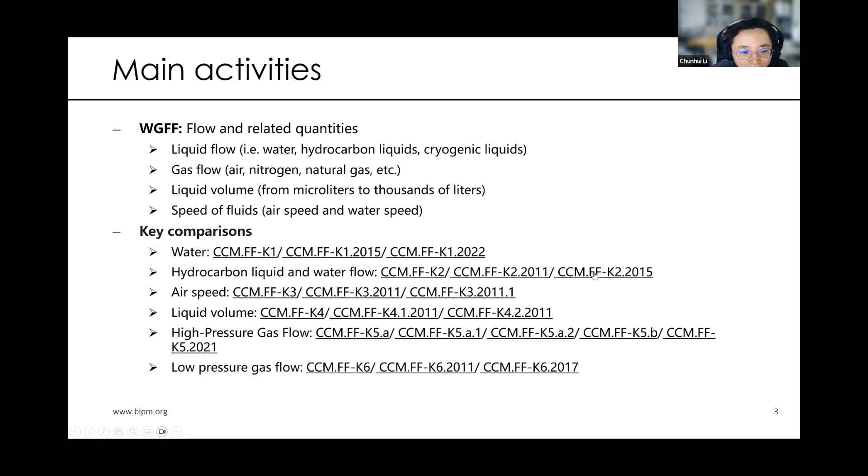And according to the requirements of the CCM and the CIPM, currently we have 2 guidance documents published on the BIPM website. The first is on CMC uncertainty and calibration report uncertainties. This document is the guide on uncertainty to ensure a consistent approach for CMC entries as well as calibration reports. This document was released in 2013. Another document is for the CMC review protocols.

This document is a guide on the intra- and inter-RMO review of new or modified CMCs to ensure a consistent approach and efficient work. In this document, according to the different areas, we give very specific requirements for the CMC evidence. So this work helps all the reviewers do these reviews very efficiently.

In fact, with the release of the KCDB 2.0, we are working on the revision of this review protocol. This work was a little bit delayed due to the pandemic, because it already started before the pandemic. We had some very detailed discussions in person, but during the pandemic this work was delayed. Last year, we had hybrid meetings in our group. So this revision work will be finished soon. We hope the revised protocol will be released this year.

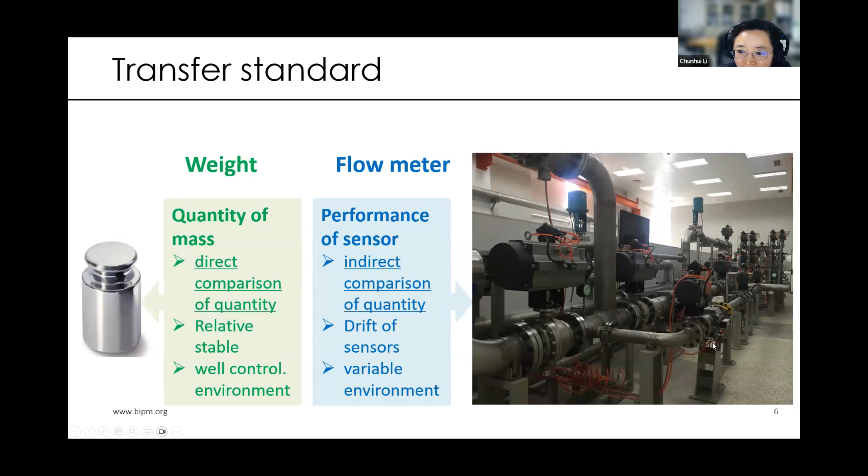But for us, you can see this typical gas flow facility. The facility is located in a relatively big space. The meter under test, the transfer meter, is here, and it is a kind of turbine meter. It is generally used for gas or water flow comparisons. For these comparisons, the flow rate is determined by the flow facilities, and we cannot achieve exactly the same flow rate.

The exact flow rate is determined by the conditions of these flow facilities. Due to the big space, the environment is too difficult to control very well. Unlike mass comparisons where temperature can be controlled to plus minus 0.1 degree, for fluid flow comparisons, especially high pressure gas flow facilities, the temperature may only be controlled to plus minus 2 degrees C or plus minus 1 degree C.

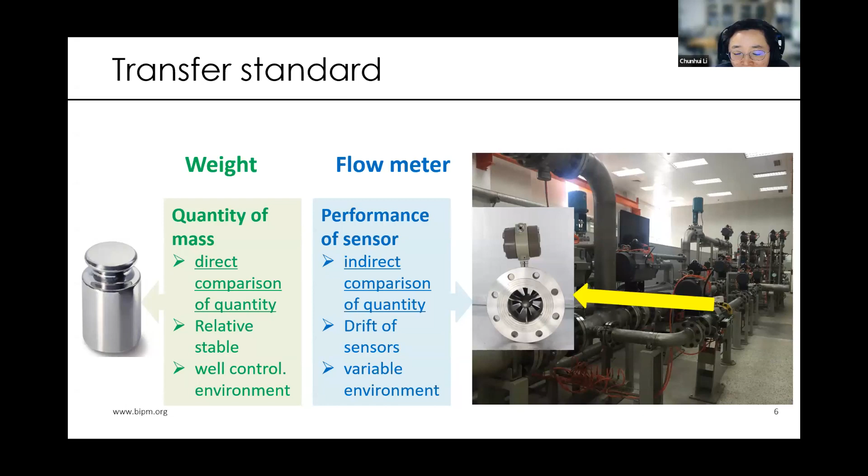There are many components for the flow meters, so the final result is a complex result. It reflects the performance of the complete sensor system, and all sensors have drift. That's the reason why the transfer meter evaluation is so important for us.

According to our available knowledge, in the future our work will be focused on 3 parts.

The first is to finish the CMC review guide as soon as possible. As I said before, this work is a little bit delayed because there's a big change for the KCDB website, and there's still some new requirements for these new guidelines. But anyway, we hope the revised guidelines will be released this year.

Another important part for the WGFF is we hope we can develop a new method for the KCRV evaluation method. I will explain more in the next page. We have started some work for this topic.

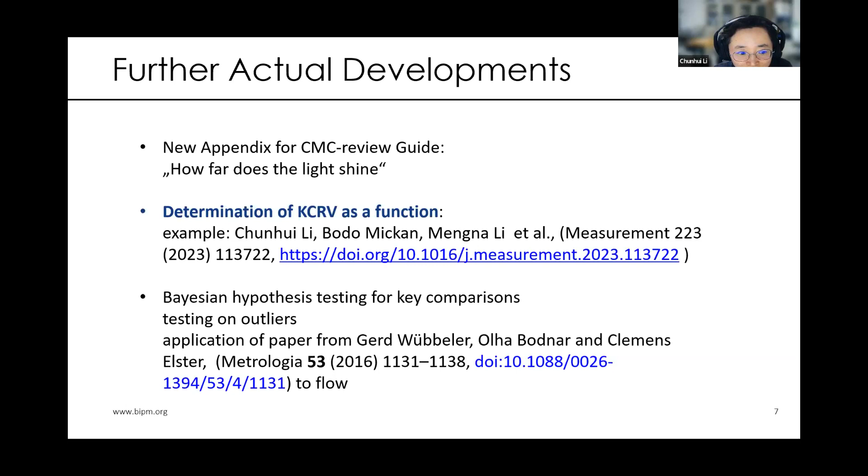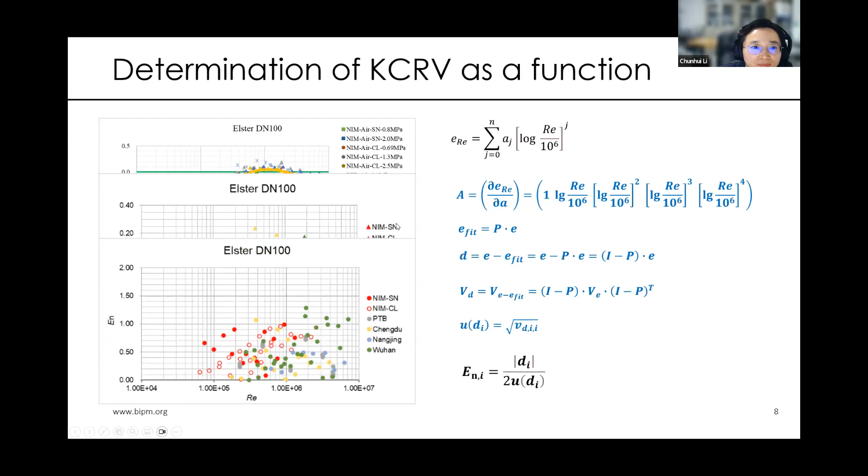For the liaisons and stakeholders part, currently each RMO has a relevant TC related to our working scope. So we organize regular communications with all the RMOs, so we can discuss what they want WGFF to work on, something like that.

For other stakeholders, IMEKO TC9 is related to our scope. For this TC9, every 3 or 6 years we also cooperate with TC9 to organize the International Flow Field Conference, to communicate with all the colleagues in the flow field.

We also have a close relationship with ISO TCs such as TC48 and TC30. And also we have a close relationship with the legal metrology OIML TC8 and other accreditation organizations in the fluid flow field.

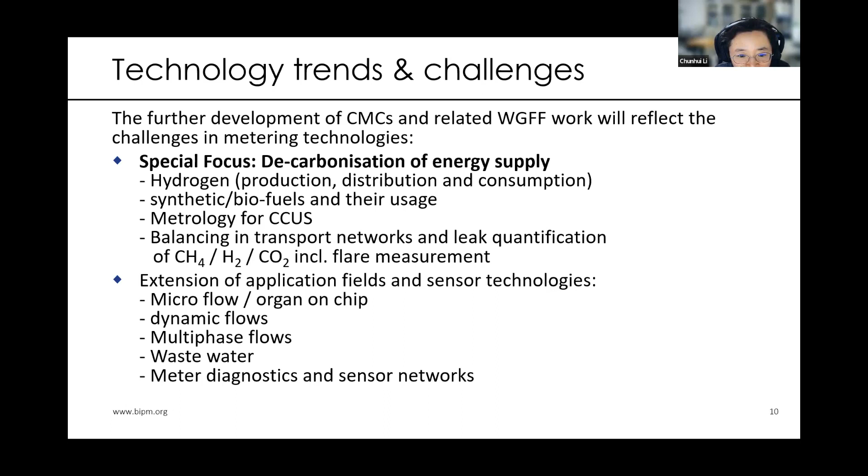For the CO2 part, we also started some work for the CCUS areas. Another topic is balancing in transport networks and leak quantification for methane, hydrogen, and CO2, including flare measurement. Another topic for us is to extend the application fields and sensor technologies, including microflow, organ-on-chip, dynamic flows, multi-phase flows, waste water, meter diagnostics, and sensor networks, and so on.

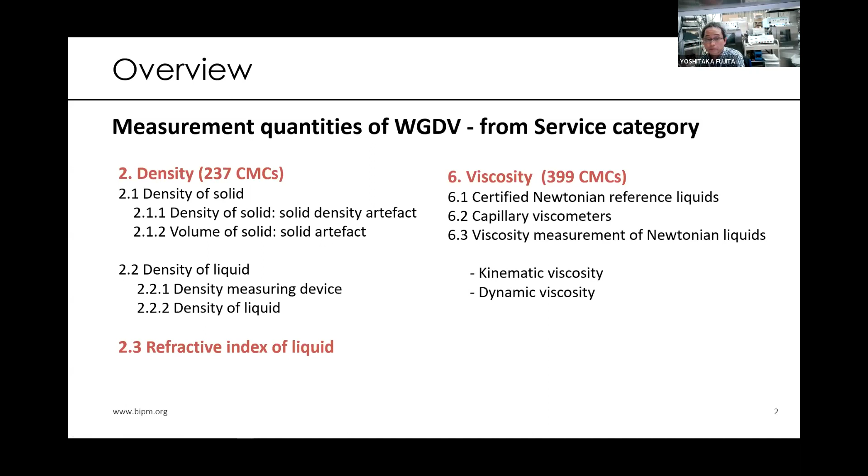As for the membership, the chair is me, Yoshitaka Fujita, NMIJ, chairing viscosity, and the vice chair is Luis Omar Becerra, CENAM Mexico, chairing density. But Luis Omar has recently sent us his intention of resigning as vice chair, so we have to search for the next candidate in the near future.

Presently, there are 26 NMIs, DI, BIPM, and 6 RMO TC-M chairs. Other than these members, as observers, approximately 10 NMIs have participated in the WG meetings.

WGDV is a merger of WG Density and WG Viscosity in 2014. The WG meeting is held in the week of the CCM meeting at the BIPM. For this WG, it's difficult to hold a meeting at conferences or other occasions, because there are almost no conferences gathering all the members of density and viscosity in one place.

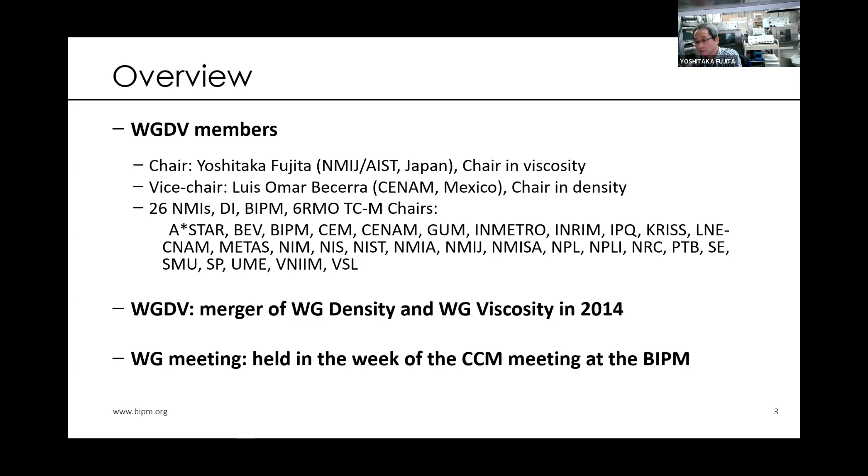In density, we have many kinds of key comparisons depending on classifications of service category, such as solid, liquid, and measuring devices. For the purpose of introducing outlines of comparisons, an example of the traceability system on density standard is shown.

Density of the silicon sphere is determined based on the defining constants of the SI, the Planck constant and the speed of light in vacuum, using the interferometric method and mass measurement.

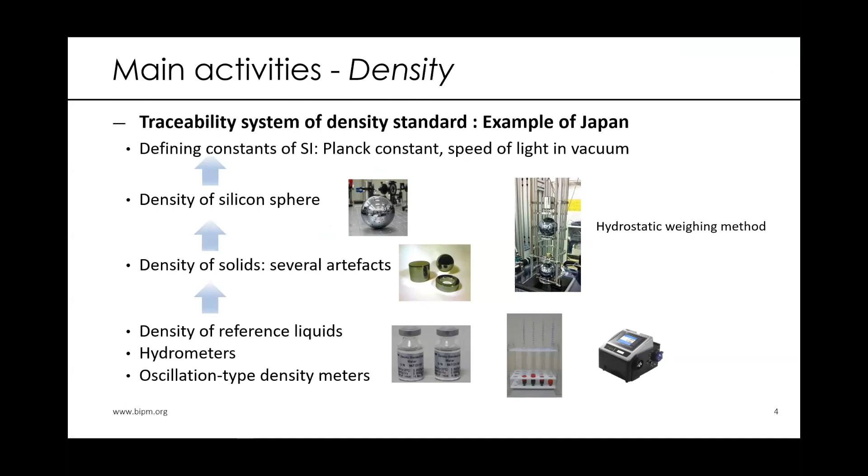Based on that primary standard, density of solids, such as several artifacts, are determined. Based on the densities of those artifacts, services of calibrations such as density of reference liquids, hydrometers, and oscillation type density meters have been provided to density users.

These are the comparisons of density. CCM DK1: density measurements of silicon sphere, being piloted by PTB with 11 participants, measurement in progress.

DK2: liquid density, pilot not yet decided, planning under consideration. Sharing activities for sample preparation by a collaborating group, and also sharing cost among participants, were suggested in the discussion of the last WG meeting.

CCM DK3: density measurements of stainless steel weights, being piloted by NMIJ with 15 participants, protocol in progress. CCM DK4: hydrometer calibrations, planning is awaited to start. CCM DK5: density measurement by oscillating type density meter, being piloted by BEV with 17 participants, measurement completed.

Lastly, a pilot study of surface tension. This was proposed as a new field in the last WG meeting, and about 7 NMIs are interested. A similar project has been implemented in a preceding EURAMET project, so initiating planning by some NMIs for this project is expected.

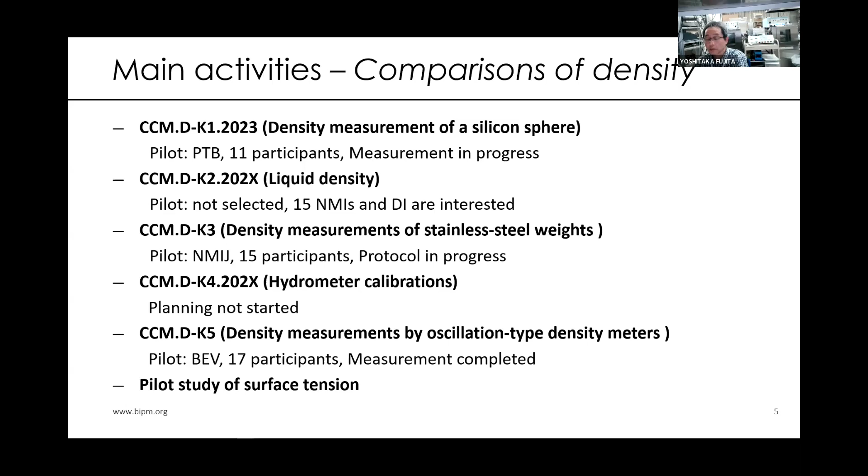And this shows a comparison of refractive index of liquid. CCM DK6 being piloted by NMIJ. 10 NMIs, including a few NMIs in CCPR and DI, are interested, and a questionnaire is in progress.

And also showing standard liquids. It is to be distributed to participants, covering a certain range of refractive index with several kinds of liquids.

There are two methods for absolute measurement of refractive index of liquids. One is the interferometric method. Refractive index is determined by measuring changes in the optical path, the optical path differences between sample and vacuum.

The other is the minimum deviation angle method. The refractive index is determined by measuring the minimum deviation angle of incident light and the apex angle of the prism.

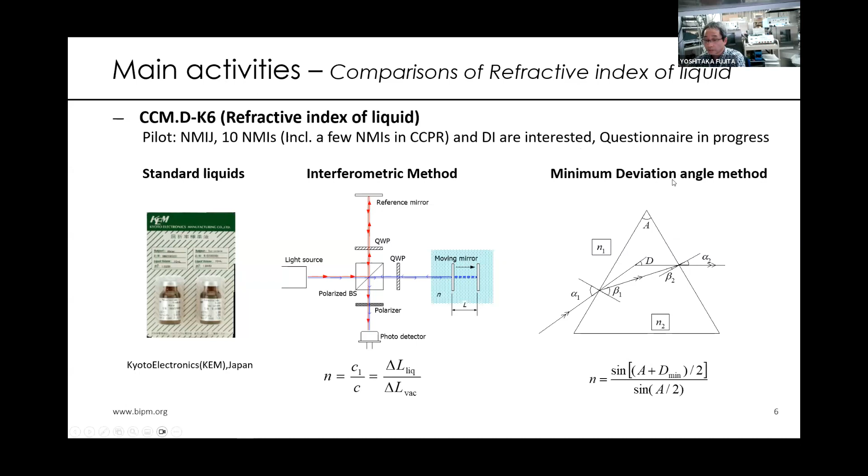This figure shows the total system of the viscosity standard. The metrological base is the absolute value of water viscosity described in ISO. Based on this viscosity, instrumental constants of viscometers are successively calibrated up to the viscometer for high viscosity range, which is called the stepping-up procedure. By using these master viscometers, the viscosity scale covers a wide range of viscosity, more than 100,000 times the water viscosity.

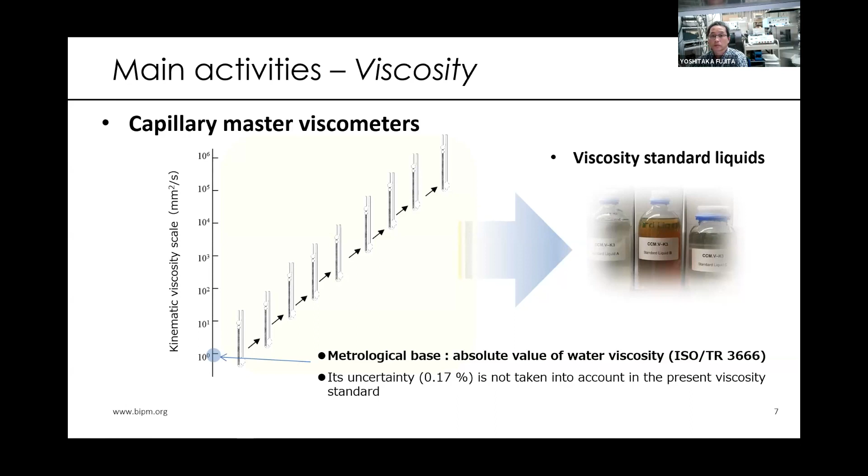Two or three standard liquids with different viscosity levels are distributed to the participants of key comparisons. So far, 3 key comparisons have already been completed, and 2 key comparisons are underway.

CCM VK4, piloted by CENAM, Mexico, with 12 participants. Draft B is in progress, and this is almost completed.

And CCM VK5, piloted by NIM, about 15 to 16 NMIs and DI are interested in participation. The questionnaire will be prepared in the near future.

Each key comparison has been carried out by alternating between wide viscosity range at moderate temperatures and moderate viscosities in the wide temperature range.

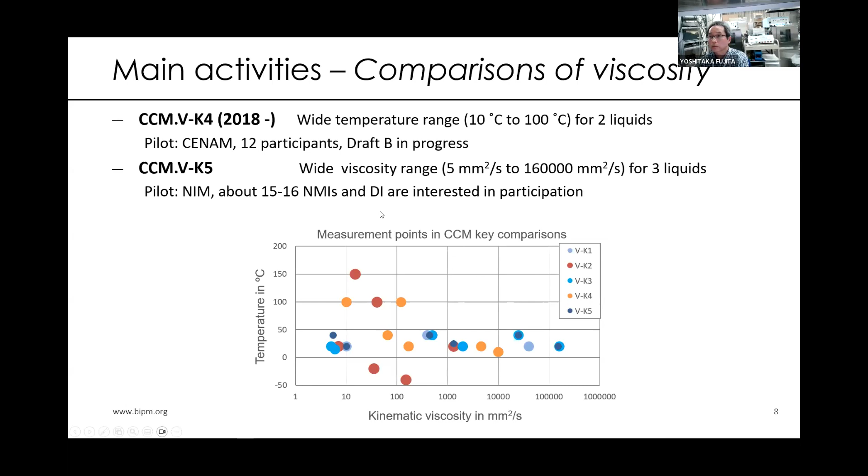This is for guidance documents. As to the guidance documents, according to the CCM action plan, we presently have no document and have just started to work toward documentation about simplification and reduction of the number of CMCs for viscosity.

The number of entries of viscosity is doubled by two quantities, kinematic viscosity and dynamic viscosity, and also tripled with the addition of reference liquids. So, kinematic viscosity is an essential quantity in capillary viscometry that is underpinned by key comparison. It was proposed in the last WG meeting that dynamic viscosity and reference liquid be merged into one entry of corresponding kinematic viscosity using the comment column.

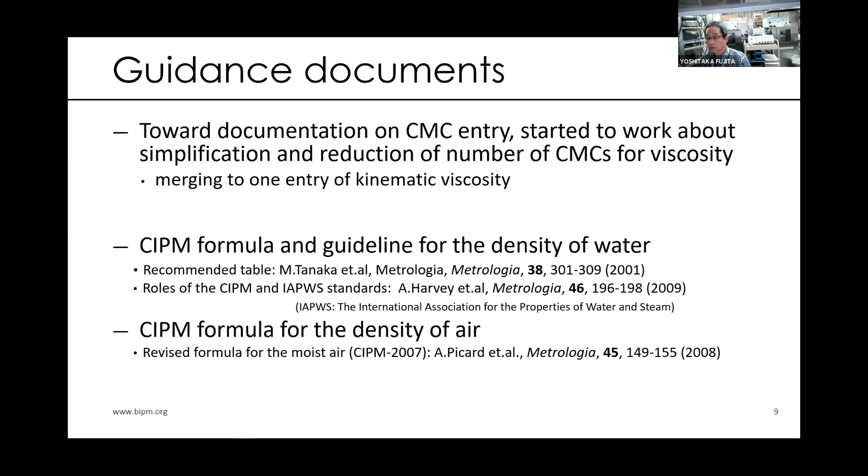As a past result, WGDV contributed to the establishment of the CIPM formula for the density of water in 2001, and then published a guideline for the use of CIPM and IAPWS. IAPWS is the International Association for the Properties of Water and Steam. It also contributed to establishing the CIPM formula for density of air in 2008.

As for liaison and stakeholders: in liaison, ISO TC48 SC4 regarding density hydrometers. At the request of this ISO committee, Vice Chair Luis Omar has participated in this committee and acted as liaison between the ISO and WGDV.

As I mentioned before, as a past result, we had relationships with IAPWS on the guidelines for the use of CIPM and IAPWS formulas. Some members of WGDV are involved in RMO projects, for example this Euramet project, one for density measurement and the other for viscosity measurement, which have been reported in the WG meeting, in the last WG meeting.

As for stakeholders: industries of energy, alcohol, food, materials, refrigeration and air conditioning, and manufacturers of density meters, refractometers, and viscometers, and reference material producers, and calibration and testing laboratories such as accredited laboratories and agencies involved in taxation related to alcohol taxation using density measurement.

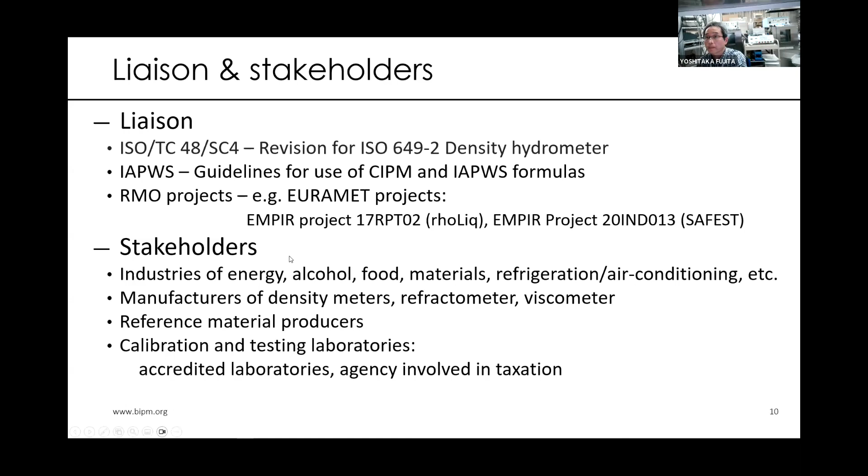As for technology trends and challenges: realization of a more accurate and reliable silicon density standard based on reduction of uncertainty in sphere volume measurement. It is expected that this would be reflected in the result of the key comparison on density measurement of silicon spheres and other varieties of density measurements in the future.

And supplying traceable refractive index standard liquids, ensuring reliability by implementing key comparison CCM.D-K6, to meet the demand from food industry and agriculture. And supplying traceable surface tension reference for reliable measurement in science and industry.

And application to interdisciplinary areas based on accurate density measurement. One is seawater density measurement to predict global climate change. The other is pρT properties over wide pressure and temperature ranges, to meet the demand for improvement of heat pump systems using alternative refrigerants to prevent global warming.

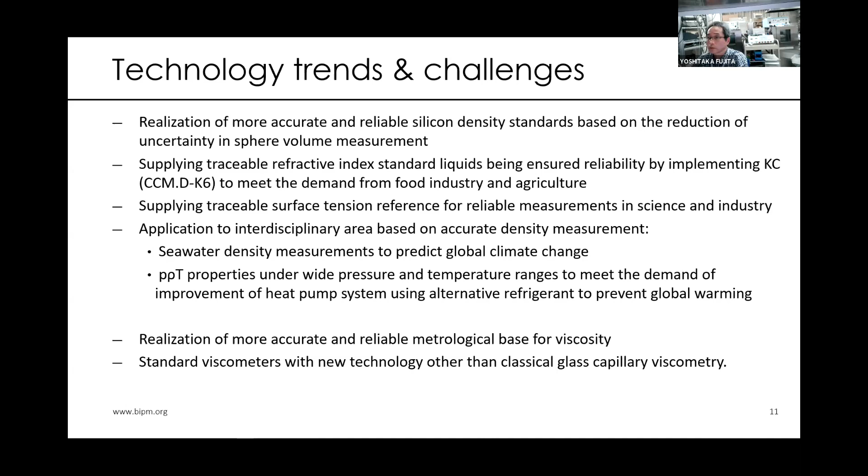And this is an interdisciplinary topic of density measurement for global environmental science. Global level circulation of ocean water affects global climate change due to its high heat capacity that is much larger than that of atmosphere. And in the study to understand the mechanism of global climate change, accurate density of seawater that is traceable to SI is required with uncertainty of less than 1 ppm.

To achieve this subject, hydrostatic weighing system for seawater has been developed to increase in accuracy of standard seawater for calibration of oscillating tube densimeter used in the actual ocean observations.

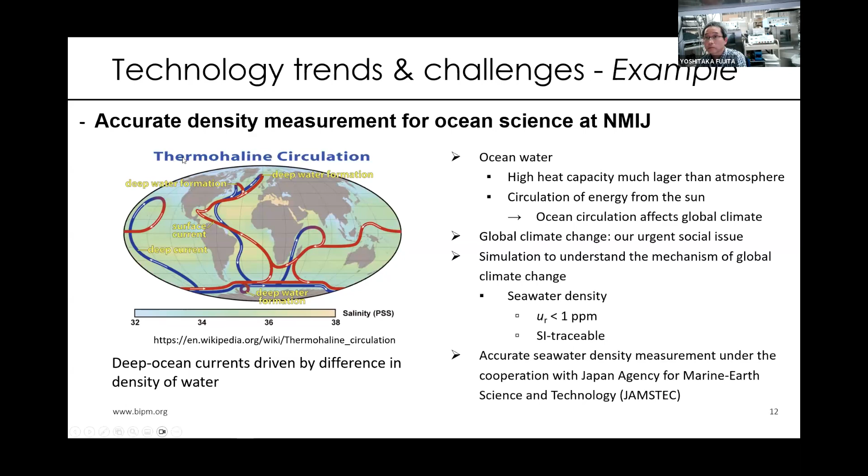And this is a topic for realization of more reliable and accurate metrological base for viscosity. Uncertainty of this metrological base, the absolute value of water viscosity, is 0.17%, that is described in ISO. But this uncertainty is not taken into account in the present viscosity standard. This is due to ambiguities of ISO value originating from a few results of previous absolute measurements. So new experimental results with modern measurement technology have been required to update this value.

And to achieve this subject, absolute measurement system for viscosity determination at middle high viscosity by falling ball method has been developed. And based on this determined viscosity, viscosity of water will be determined by using stepping down procedure of capillary method with the uncertainty of less than 0.1%.

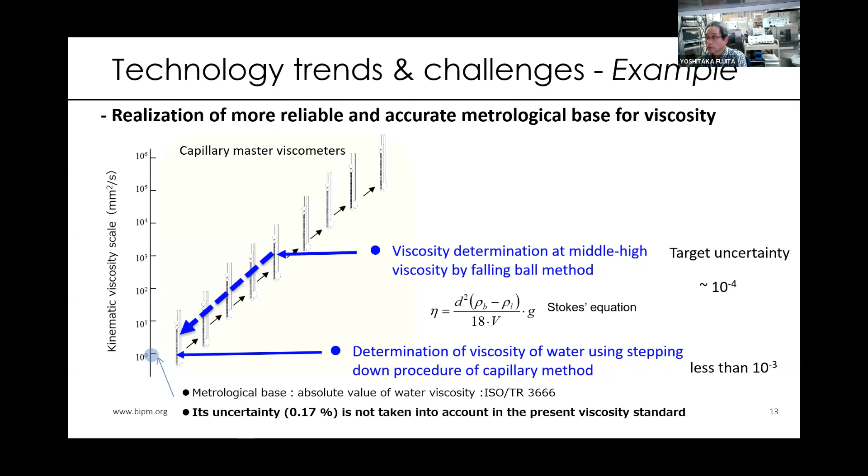I'm Julia Scherschligt. I recently became chair of the working group on pressure and vacuum. We were formed in 2014 through the merger of the working group on high pressure and the working group on low pressure, which of course is vacuum. And it was determined at the time of the merger that leadership must represent both aspects. So I am nominally a vacuum expert, and our vice chair, Dr. Hiroaki Kajikawa from NMIJ, is a pressure expert.

We have 21 member institutes and 6 observer institutes representing all RMOs. And we have CMCs in pressure and vacuum that cover the range from nanopascal to a gigapascal. Unlike some of the other working groups that we've heard from, we only concern ourselves with a single unit. So we're just worried about the Pascal, but we do have to worry about that unit over 18 decades.

For context, 1 atmosphere is about 100 kilopascal, and it might be an interesting question to ask yourself, is this the distinction? Is this where we draw the line between what is pressure and what is vacuum? That sometimes is a nice way to think about it, but realistically, the distinction between pressure and vacuum is really more about the technology used to realize the unit and less about exactly where on this pressure range you're talking about. So it's more of a technological distinction and less about a numerical distinction.

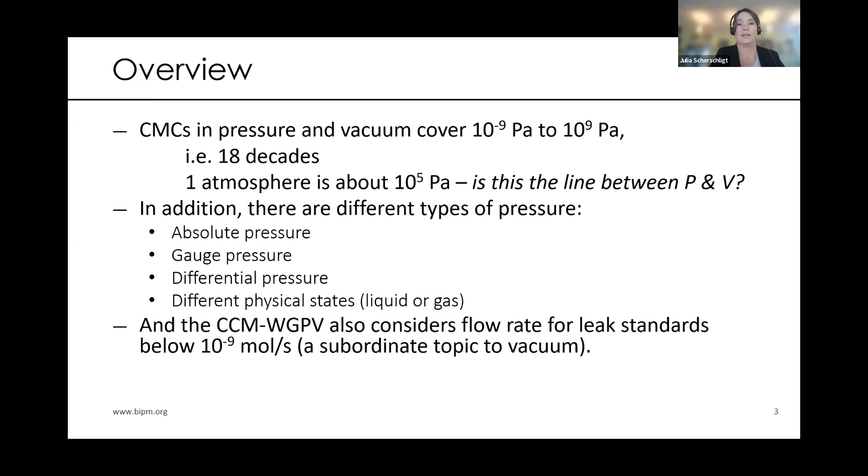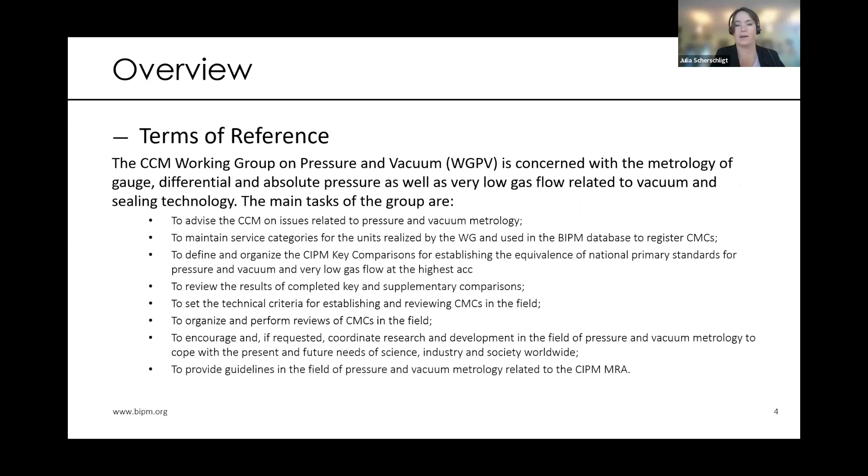And a lot of the technology used to do a calibration of one of these standards is the same as the technology that's used to do vacuum calibrations. And so it makes sense for us to also take care of that particular item within the working group. If you go to the website, you'll find a list of terms of reference, which nicely encapsulates the things that we work on. However, I find this a little bit hard to make sense of. It's a little bit too large. So I summarized it down to a few bullet points.

And then of course, to liaise with technical colleagues and stakeholders to ensure that our activities within the working group are aligned with their activities in the field so that as their needs evolve, our support evolves along with those needs so that in the future we continue to meet their needs.

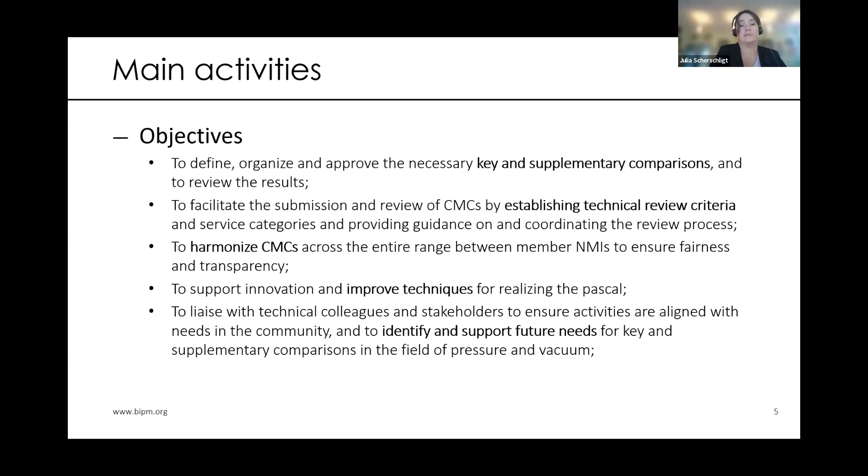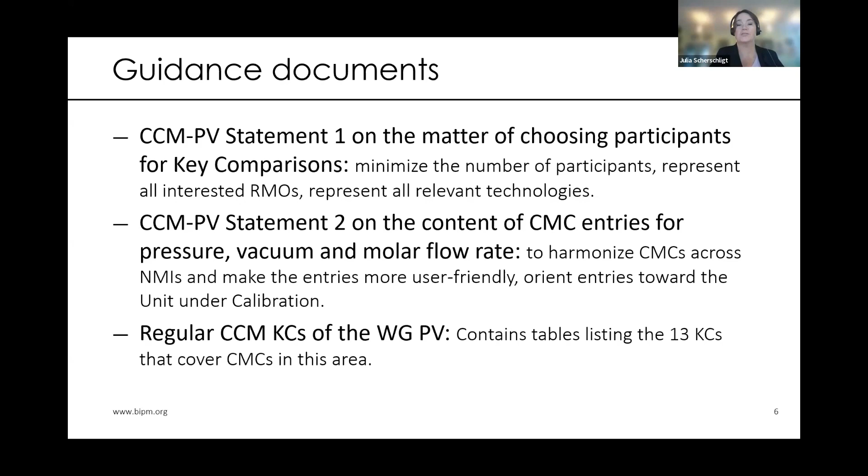We also, of course, have all of the key comparisons presented online, and we have a statement 2, which is regarding the need to orient CMC entries towards the unit under calibration. And this is because we cover across these 18 decades of pressure, there are a number of different types of gauge, types of technology. And if someone comes to the website to look for which NMI they might want to use to have something calibrated, they might want to search for that particular gauge. And we want to make that as easy for them as possible.

This statement 3 is a relatively new one, and I'm not sure whether or not we have a final version of this on the website or not, but this was just recently completed within the past couple of years. It was developed by a task group that I was involved in. And what this thing does is it ensures that the uncertainty reported by the CMC includes an uncertainty from the unit under calibration. In other words, say we have two NMIs, NMI 1 and NMI 2.

And NMI 1 believes that it is correct and appropriate to include the test unit uncertainty in their CMC, but NMI 2 does not. When they publish those CMCs, they're going to have vastly different uncertainty statements, despite perhaps being very similar in what they can actually deliver. And so someone coming to the website might think that their capabilities are rather different when in fact they're very much the same.

In order to correct that discrepancy, we wanted to ensure that all NMIs are including the uncertainty of the unit under calibration and that they're doing it in a uniform way. So we just developed a list of best possible units under calibration for each type of pressure in each range, and a statement on the uncertainty of that best unit under calibration.

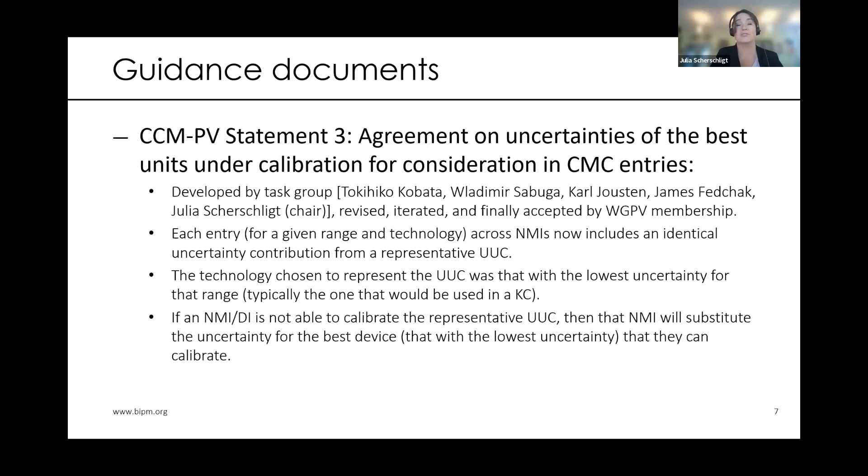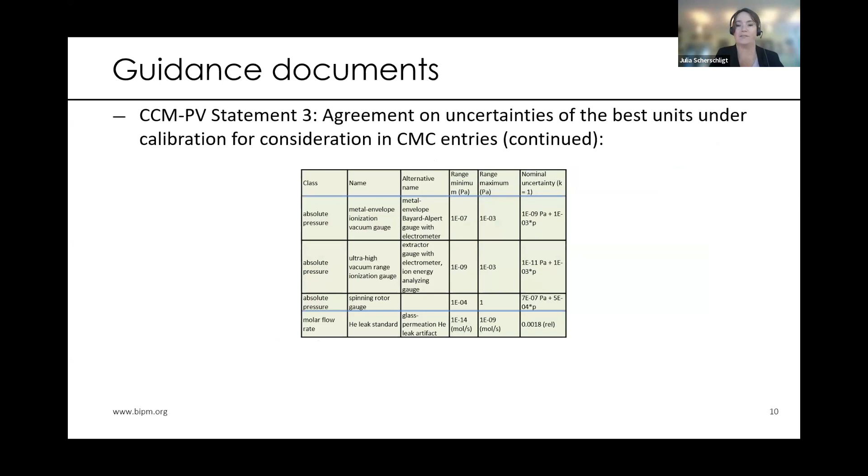One last guidance document to talk about is the one for reviewers of CMC entries. This is another recently completed document. And what this allows us to do is provide guidance for someone who's tasked with reviewing a CMC. Let's imagine that you've been given this task and you receive documentation and you don't know whether or not the documentation that you've received is adequate. And so you would go to this document and you would say, all right, I have received an application for a CMC, and I am going to determine using this document whether this is a high risk, a medium risk, or a low risk CMC.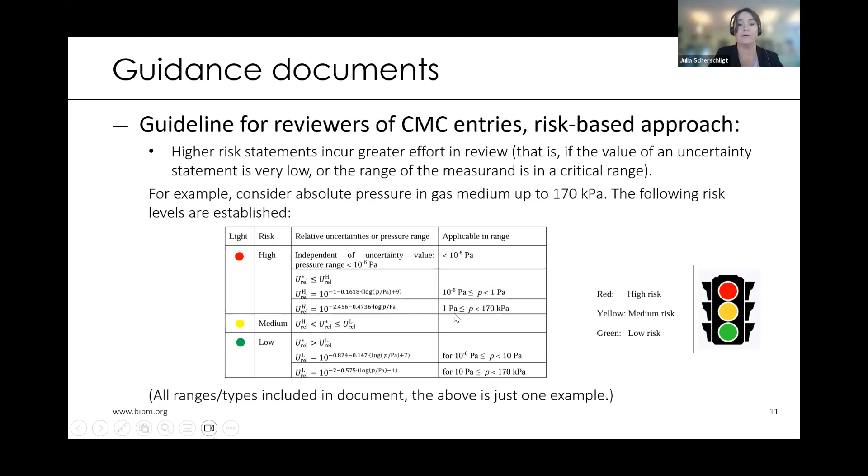There are these charts in the document that will allow you to calculate the risk level based on the uncertainty claimed in the CMC relative to the uncertainties in this document. You make the determination of the risk level, and then once you have that, this example is for absolute pressure in gas medium up to 170 kPa. Let's imagine that you've established this particular CMC that you're meant to review is a medium risk level.

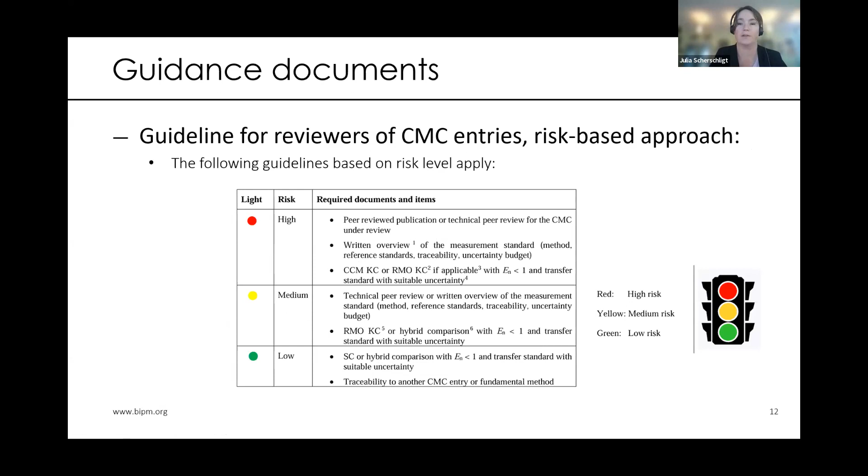Then you would go to this chart, and that tells you exactly what documentation you need to have in order to make that determination. And in our case of a medium risk level, you need to have a technical peer review or written overview of the measurement standard, along with key comparison or hybrid comparison. And then depending on the type of pressure that you have and the uncertainty level, these charts are available in the document covering all of the CMCs that we have.

So that covers all of the guidance documents that we have on the website. The last thing before we get into the technology part is liaison and stakeholder activity. We're active in a number of technical committees, including IMEKO TC16 for pressure and vacuum, the International Union of Vacuum Science, Technique and Applications, IUVSTA, a number of other vacuum societies, IVC, EVC, and AVS are all vacuum societies, along with the ISO Vacuum Technology Technical Committee.

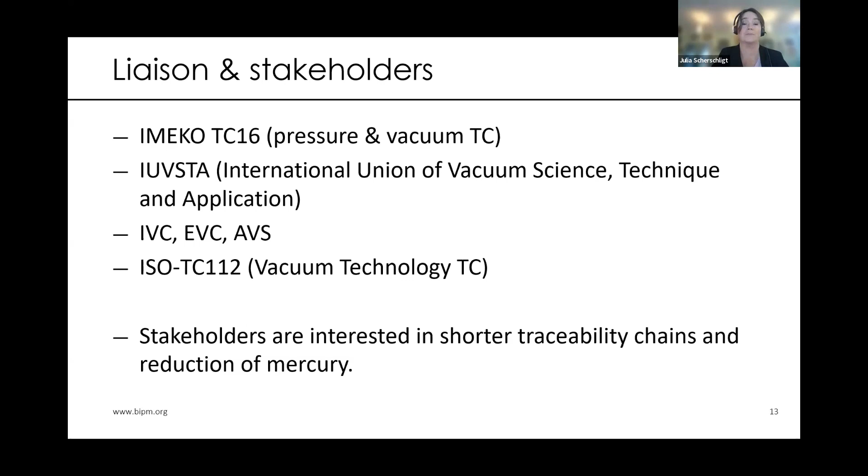It's interesting to point out that most of these are oriented towards vacuum. There are not as many activities in pressure as there are in vacuum right now. And by and large, these stakeholders are primarily interested in, can we do something to shorten the traceability chain? And many, but not all of the stakeholders, of course, are also interested in the question of whether or not we can reduce mercury. The reason that's interesting is because historically, the primary pressure standard is the mercury manometer.

The operational range of a mercury manometer is around an atmosphere. Pressures above and below can be traceable to manometry by potentially many successive comparisons. And so these liaison and stakeholder interactions lead us to ask the question, can we realize pressure at any or all ranges without reliance on manometry? So that is

the guiding principle by which we ask ourselves, oh, there go the dogs.

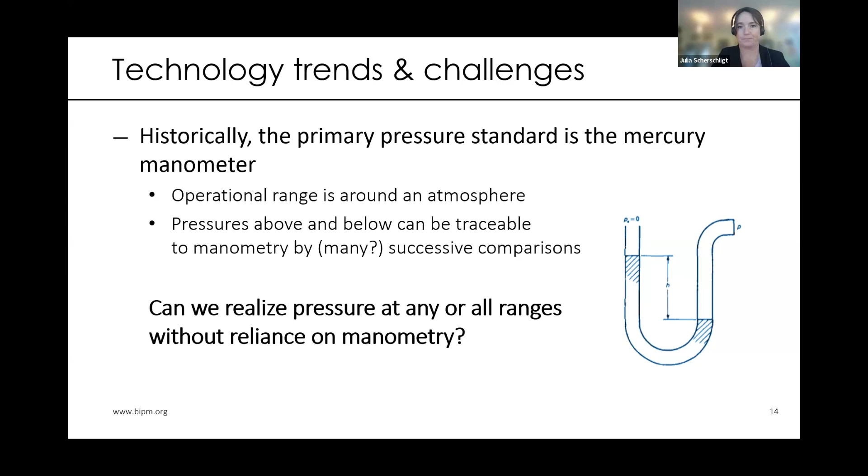What types of research projects we should look into. And it turns out that there are a number of ways to determine pressure that don't rely on successive calibrations traceable to a mercury manometer. And there are examples of this that span the pressure range from megapascal into nanopascal. And I'm going to highlight a few of these. This one is a paper that's out of PTB a few years ago.

This is a primary gas pressure standard that's based on electrical measurements. In the figure, you can see there is a traditional pressure realization device, a piston gauge that I'm sure many of you have seen. And it's connected to another device that allows a researcher to combine theoretical values of helium polarizability with theoretical values of virial coefficients of helium.

And of course, to remind you, virial coefficients are necessary when we expand the ideal gas law to the case of real gases with interacting particles, in other words, at higher pressures. And we include a measurement of a dielectric constant, and a change in capacitance gives us a change in pressure. So this is a primary realization of pressure at megapascal that does not rely on calibrated masses.

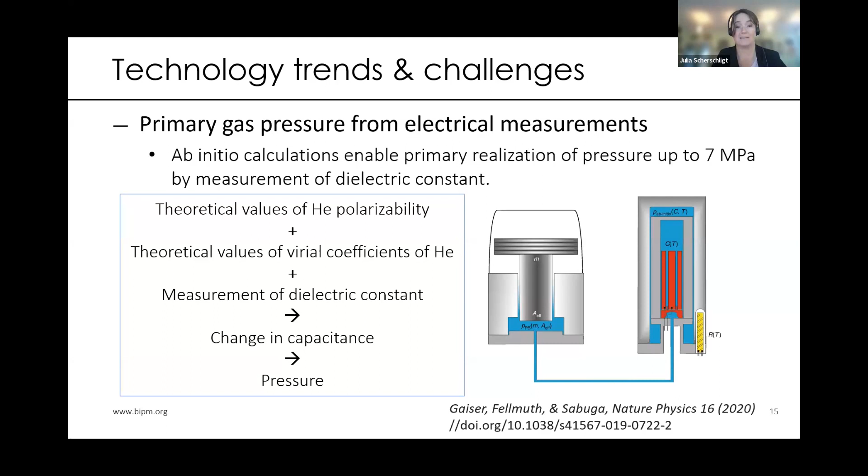We have another technology that operates around an atmosphere based on refractometry. There is an effort at NIST, which is my home institute, to develop this, as well as an effort in EMPIR. This is a technique that takes a dual cavity device. One cavity is filled with the gas of interest, and the other cavity is maintained at a vacuum. And when a laser is introduced to this device, the laser that traverses the gas-filled cavity picks up a phase shift relative to the one that traverses the vacuum-filled cavity.

And when the light is recombined, there's a beat frequency that transduces the pressure inside the cavity. And that is traceable again to helium calculations, in this case, again, the virial coefficients at higher pressures, as well as the polarizability. And that means that this is, again, a primary standard for helium, and it can be made in a deployable form factor. So this can be made into a device that you could bolt onto your chamber and get a primary measurement of pressure without needing traceability to a manometer or a piston gauge or any other pressure measuring device.

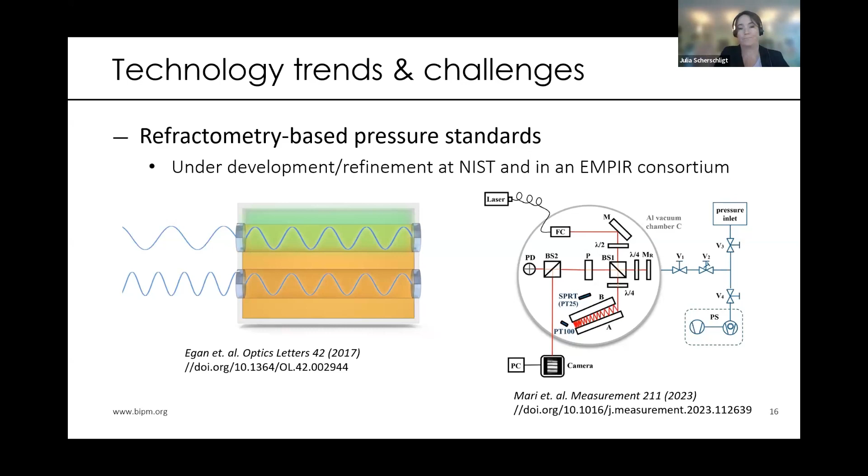And then finally, at the very lowest end of our scale, there's work to develop vacuum standards based on cold atom traps.

And this is work that I've been involved in. The NIST prototype is shown in the photograph on the right. And the way this works is the following. It has long been known that the lifetime of a trapped cloud of cold atoms depends on the level of vacuum in the chamber. And all we do is invert that relationship to turn it into a sensor of the vacuum. And that sensor is based on the lifetime of the trapped cold atom cloud.

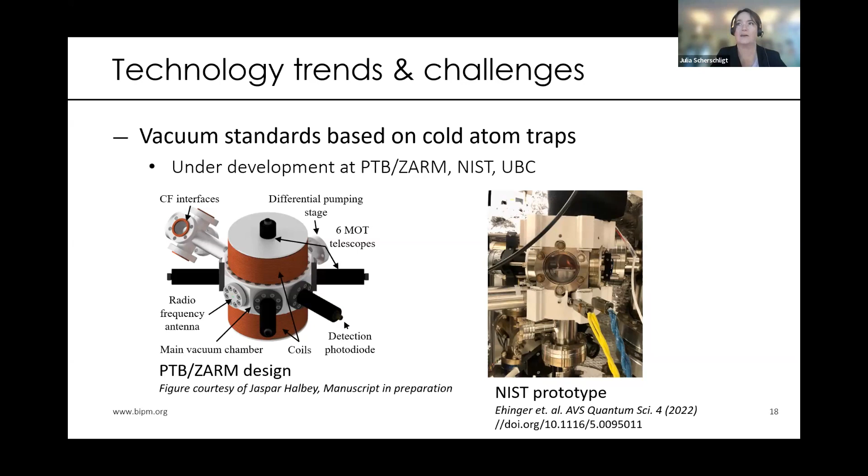If you do this carefully and painstakingly, and you take very good care to make sure that all of your possible uncertainty components are minimized and included, this again is primary. Our prototype is up and running, it works, and we've got a number of papers out. There's one under development at PTB, and the University of British Columbia in Vancouver has one as well. They've got a number of papers. I apologize, I don't have a photograph of that one, but if you want to look it up, the PI on that project is Kirk Madison. And again, that's out of the University of British Columbia.

So to sum up all of those technology trends and challenges, the important thing to point out here is that for pressure, we can call a Pascal a Newton per square meter, but it's also an energy density. It's also a joule per cubic meter. And in light of the redefinition of the SI in 2019, and all of these emerging techniques that allow us to realize the Pascal in a fundamentally primary way without reliance on successive chains of calibrations back to manometry, it might be useful to start to think about how our relationship to mass metrology should evolve.

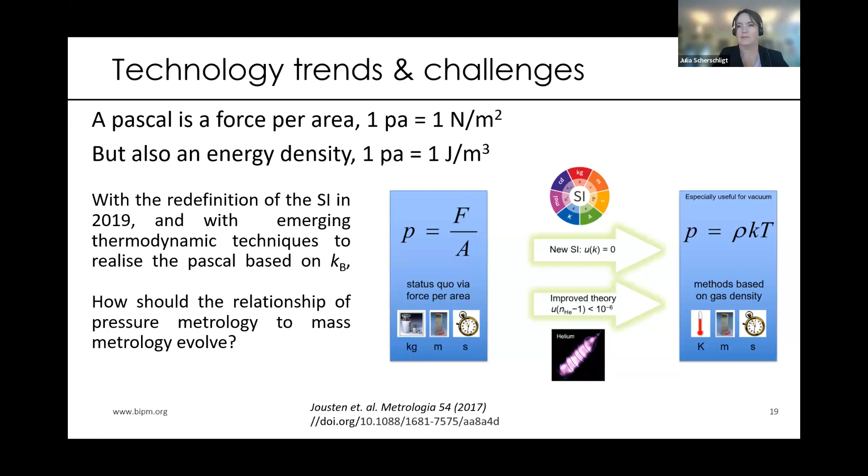And at the moment, of course, all of these techniques and technologies are new and we don't have them deployed in the field. And it will be decades before people actually get rid of their manometers. People will never get rid of their piston gauges, and we're not going to divorce ourselves from mass anytime soon. But the day might come, and it might be time to start thinking about what that will look like when it does come. So with that, I will wrap up, and thank you very much for your attention.

Okay, then I have to present the working group on hardness. An overview: the chair in this working group is me, Febo Menelao. I'm from PTB in Germany. Our vice chair is Dr. Koichiro Hattori from NMIJ in Japan. We have 18 national metrology institutes which are members in our working group: CENAM from Mexico, INMETRO Brazil, KRISS Korea, INRIM Italy, NIMT Thailand, UME Turkey, SMU from Slovakia, VNIIFTRI from Russia, GUM Poland, VNIIM also from Russia, KEBS from Kenya, LNE France, NIM from China, NIST USA, NMISA South Africa, NPL United Kingdom, RISE Sweden, and VSL in Netherlands.

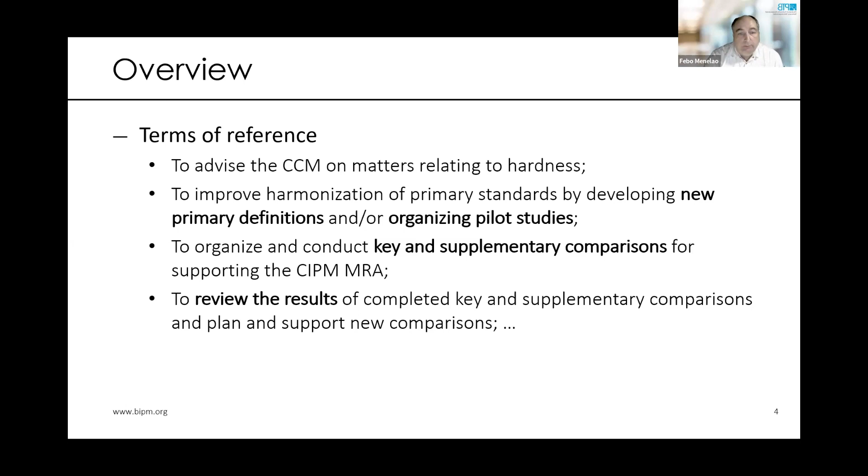Our terms of reference: the working group advises the CCM on matters relating to hardness, to improve harmonizing of primary standards by developing new primary definitions, to organize pilot studies to conduct key comparisons supporting the CIPM MRA, to review the results of completed key and supplementary comparisons and plan and support new comparisons, to facilitate the submission and review of the CMCs by establishing technical review criteria and service categories and providing guidance on coordinating the review process,

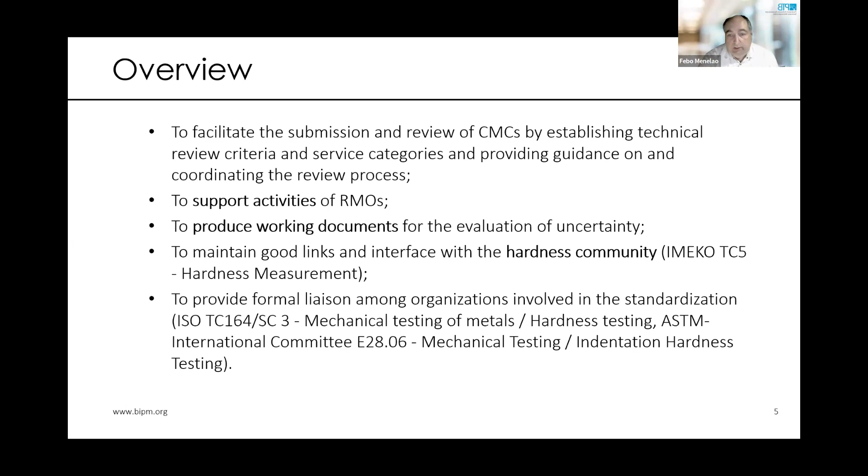to support activities in the regional metrology organizations, to produce working documents for the evaluation of uncertainty, to maintain good links to interface with the hardness community, for example the IMEKO TC5, and to provide formal liaison among organizations involved in standardization. That means the ISO community, also the ASTM community.

Mostly the audience is not so familiar with hardness, so in short, explaining by the definition: hardness is the resistance that one body offers to the penetration of another harder body. That means we do not really have a natural constant for our measurements, like the mass and so on. That makes our measurement a little bit complicated.

The description of the procedure is the definition for the value. It is not possible to calculate values between scales; between scales, you can only convert. So we have many scales in this working group: scales like Brinell, Vickers, Rockwell, which are the standard or a little bit older measurements, Knoop, Leeb, Shore for metal, Shore for plastic.

IRHD is called International Rubber Hardness Degree; it's for rubber. Instrumented indentation tests are for many materials which are possible to measure with it. UCI is an ultrasonic contact impedance measurement. The Poldi hammer, also through-indenter viewing scales, and many more which I cannot say here. The list is a little bit longer, but not all of the scales are involved in our working groups. Also, we measure not only the hardness itself, but also the indenters which penetrate the material.

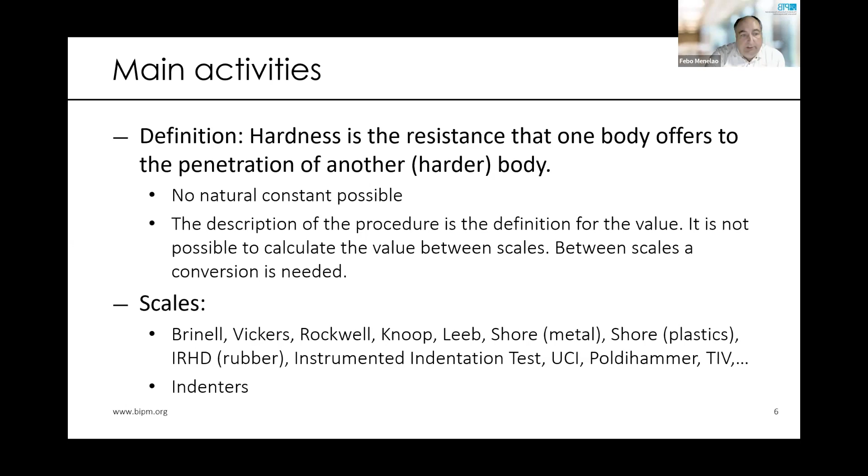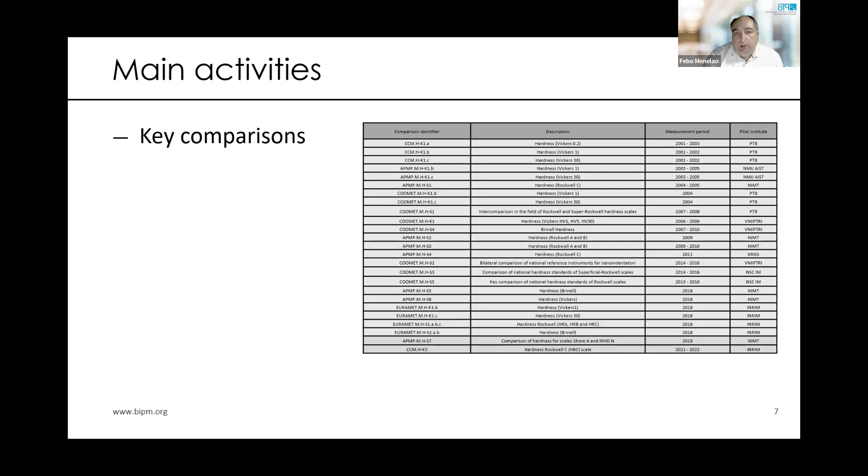Key comparisons: here's only a list which we can find on the BIPM website in the KCDB. It only shows you the number of key comparisons or comparisons that we have. The problem itself is we do not have the complete group inside the comparison, because we mostly have regional comparisons which are not registered by BIPM.

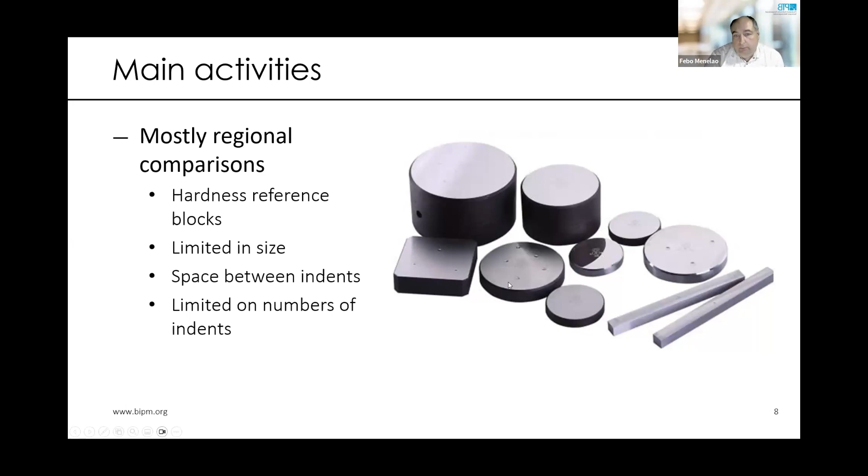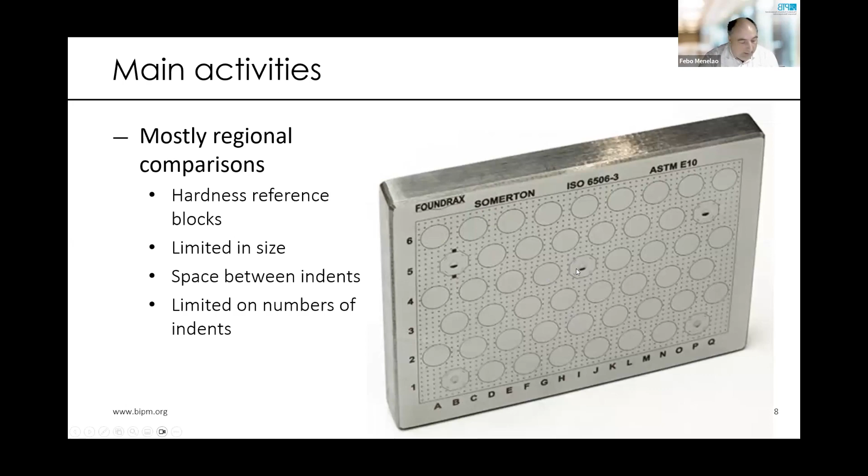So why do we mostly have regional comparisons? We have shown here kinds of reference blocks. You can see we have a limited size of the block, and if we make indents on a block, like here a small indent, this area is lost for the measurements. That's a problem in hardness measurements. For example, a force transducer you can measure thousands of times and more if you do not destroy it. Here we can only measure as long as we have space on this block, and you can see around the indents the material is deformed after we make an indent.

That means the number of measurements is limited. So you can see that not all of the institutes can measure on one block. That's the reason why we make a comparison only between some institutes, not all of them.

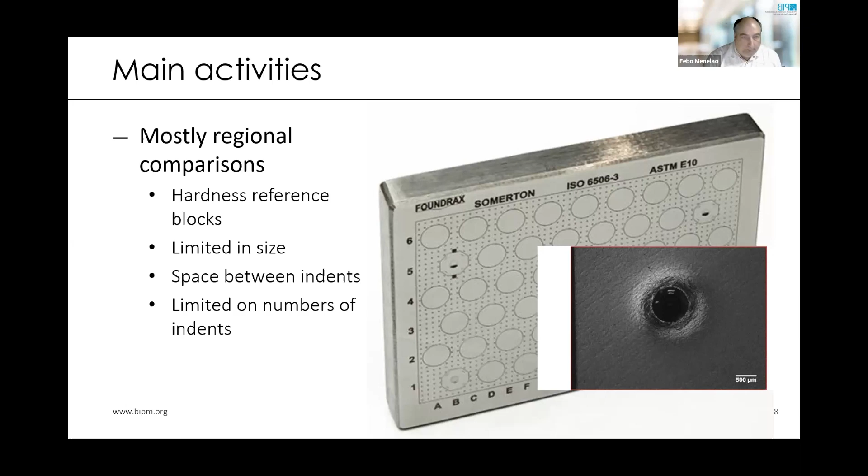On pilot studies: the indenter measurements are new in our program, so we have made a pilot study on the geometry measurement of a Rockwell diamond indenter. A second pilot study is the Leeb hardness comparison, which is also new in our group. It's still under construction and not finished, so it's not possible to see it on the website; it's coming later. And the third is pilot study 3, the Brinell hardness comparison.

There we found new insights in the last comparison, meaning that the measurement optics are very important for the comparison or for measuring the hardness. The results were in a huge range because they were made with very different objectives, and therefore we have to harmonize the microscopes we use. So we changed from a normal key comparison to a pilot study, because the comparison was not ideal, since the different microscopes gave very different results. Therefore, the definition at this time is the definition of the Rockwell scales.

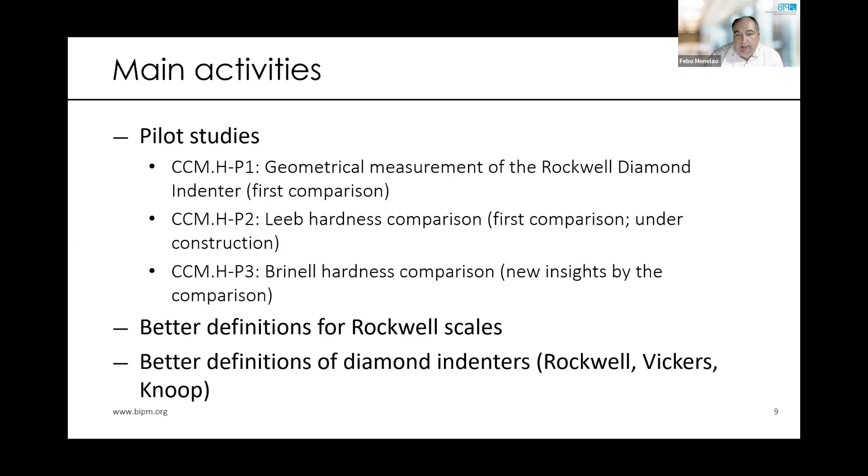Here we have the definitions of our scales that are finished, and you can find the guidance documents on the website.

The Rockwell scale has approximately 30 subscales, and similarly, the other scales like Vickers, Brinell, and Knoop also have many subscales. So we have a lot to define across all of these scales.

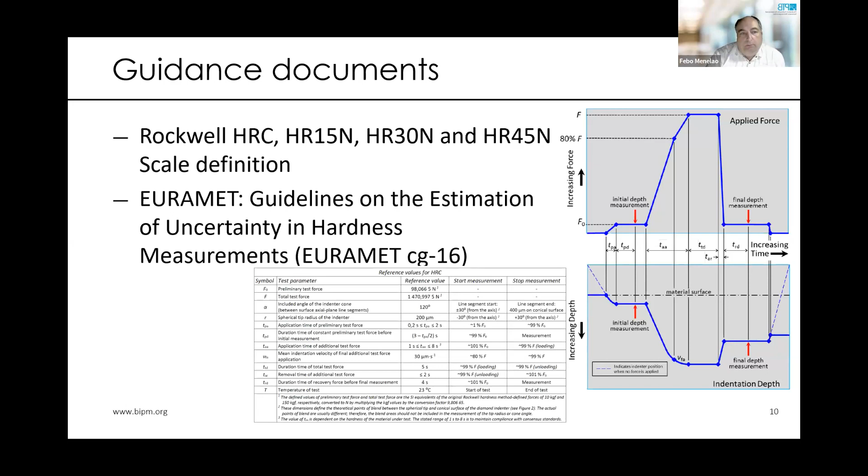The other guides we have are on the estimation of hardness uncertainty, the Euramet guide, which is also used for producing uncertainty measurements for all the NMIs. This describes an easy procedure for uncertainty measurement in hardness.

The liaisons and stakeholders we have include an ISO committee, TC 164, for mechanical testing of metals, with a subcommittee, SC 3, for hardness. Other stakeholders are manufacturers of hardness reference blocks, manufacturers of hardness testing machines, calibration and testing laboratories in hardness, and the complete steel industry, car, aircraft, and space travel industries.

As you know, cars are changing to electric ones, and the battery has very high weight. That means to make the car more efficient, the other materials have to go to a limit, the steels going thinner and so on, but the car must also survive a crash and be safe for the passengers. So that means the car must be lighter, but must also be safe.

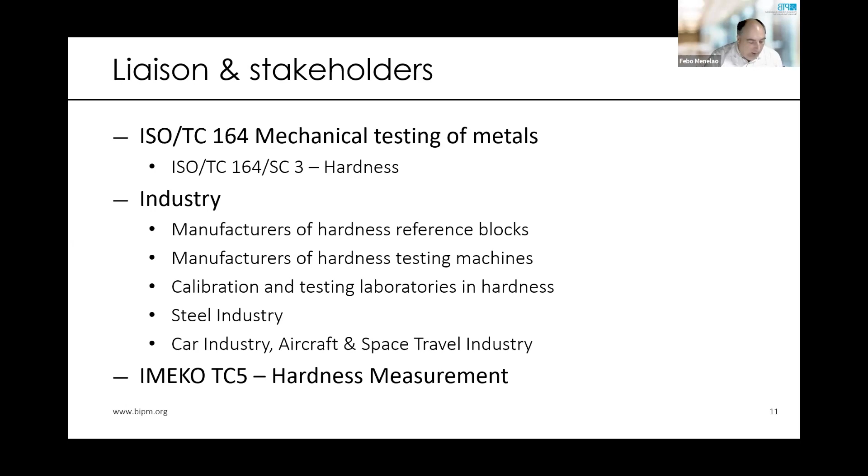Another liaison we have is with IMEKO, the Technical Committee 5 for hardness measurements. I have to make a small commercial here: this year, 2024, IMEKO is holding a World Congress, organized by PTB, my institute. You can find information on the website imeko2024.org.

It is possible to go there and find, from all of our working groups that you heard about, the newest measurement procedures and the newest results about the measurements from all of the working groups.

Our technical trends and challenges are to characterize new materials with layers having the same properties as the actual materials, but lighter, stiffer, or firmer, like in the car industry I mentioned, and to measure thinner layers on-site of other materials. It's not a based material, so it has other properties, so we also need measurements of these very thin layers of metals.

Also, additive manufacturing is a new procedure to create things. There, the material also goes thinner for production, and the time and type of manufacturing is very important. The melting process with different layer sizes is very important, so you get different material depending on whether the layer has time to cool down or you make the layers fast on-site, then you get two different materials. This also gives a different answer for the material test, and this is one of the hardest measurements.

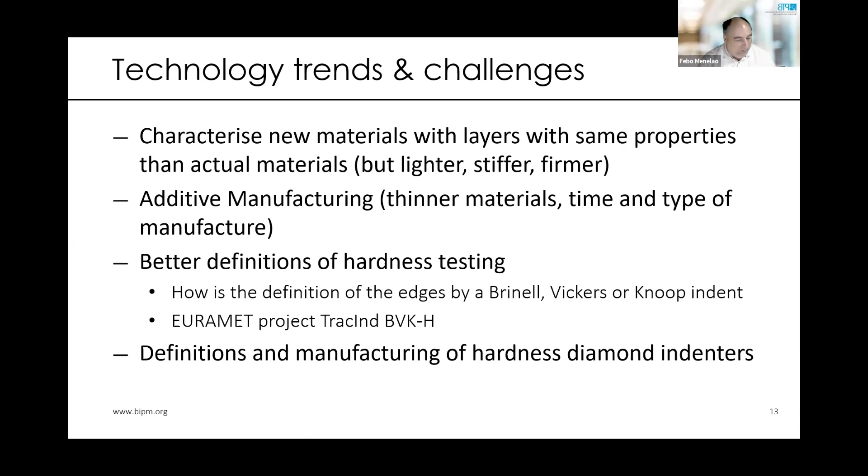And the definition and manufacturing of hardness diamond indenters - I said that the crystal structure is not easy to manufacture, so the indenter is imperfect. That means different indenters give us different hardness values, and harmonizing this is also a challenge we have to work on in the near future.

This is my information, and I hope you can follow it, and I'm free for questions.